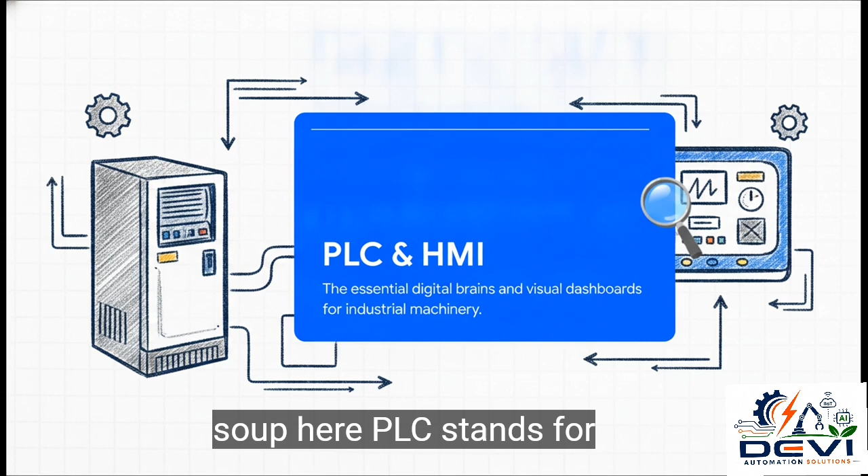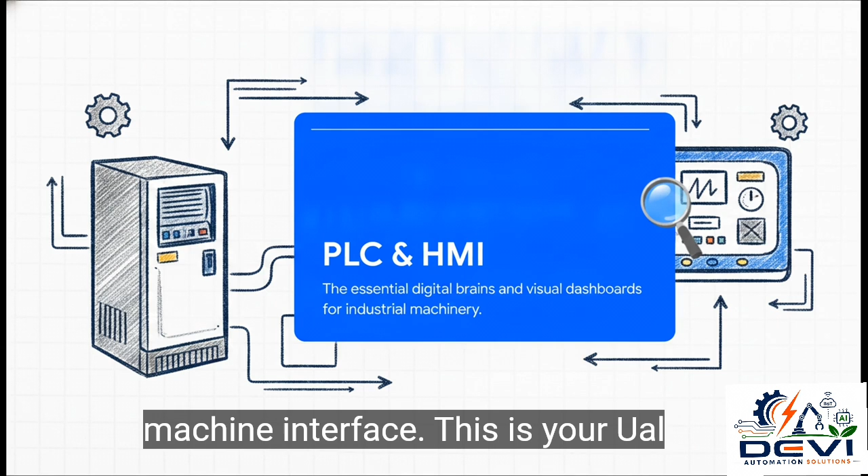So let's unpack the alphabet soup here. PLC stands for Programmable Logic Controller. It's essentially a ruggedized, super heavy-duty industrial computer making all the actual logic decisions on the floor. HMI stands for Human-Machine Interface. This is your digital dashboard, the physical screen, the buttons, the graphics, that allows an operator to monitor the system and jump in if needed. The crucial takeaway: one calculates the complex behind-the-scenes logic, and the other translates all that data into a visual, touchable interface.

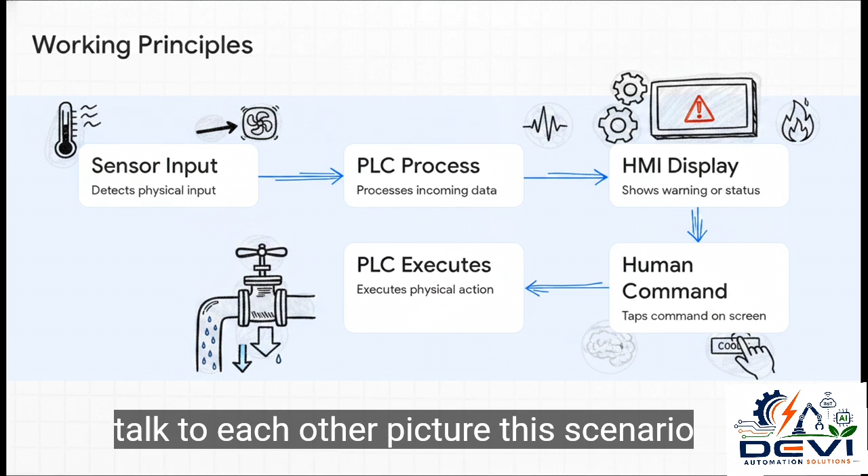Moving to Section 2, Components and Working Principles, basically how these two systems actually talk to each other. Picture this scenario: a machine on the floor is starting to overheat. Step 1, a physical sensor detects that temperature spike. Step 2, the PLC brain instantly processes that incoming heat data.

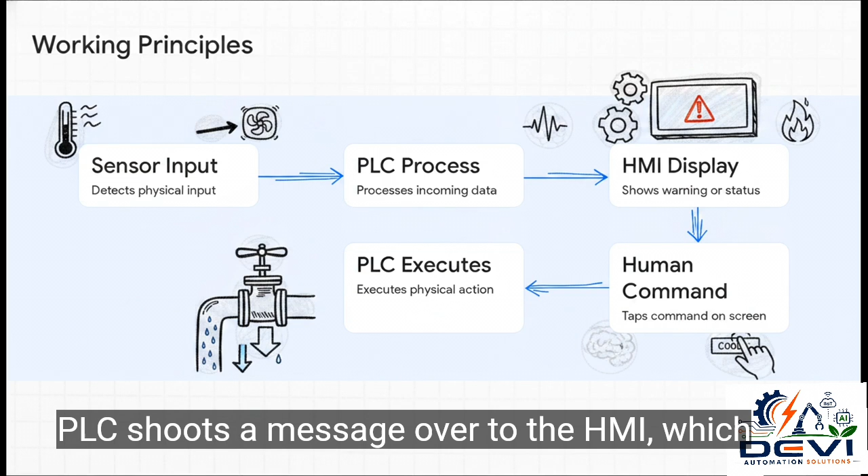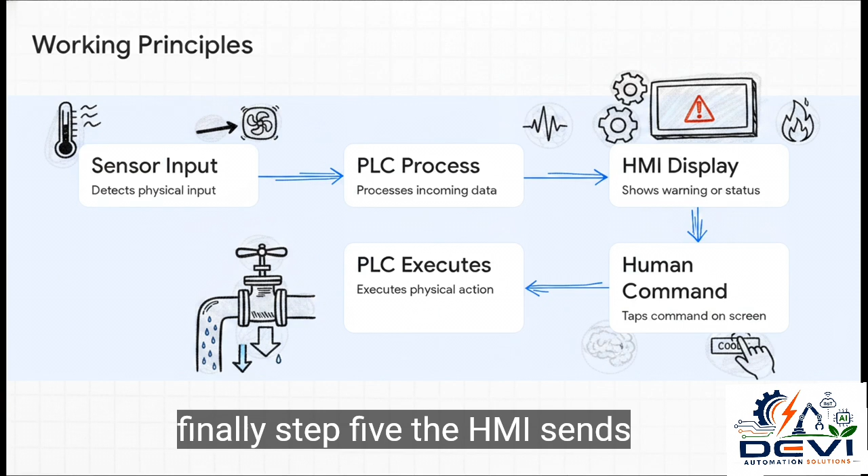Step 3, the PLC shoots a message over to the HMI, which immediately flashes a bright red warning on the operator's screen. Step 4, the human operator sees that visual cue and taps a cooldown command right there on the HMI. Finally, Step 5, the HMI sends that instruction back to the PLC, which instantly opens a cooling valve. It's a flawless split-second conversation happening in the blink of an eye.

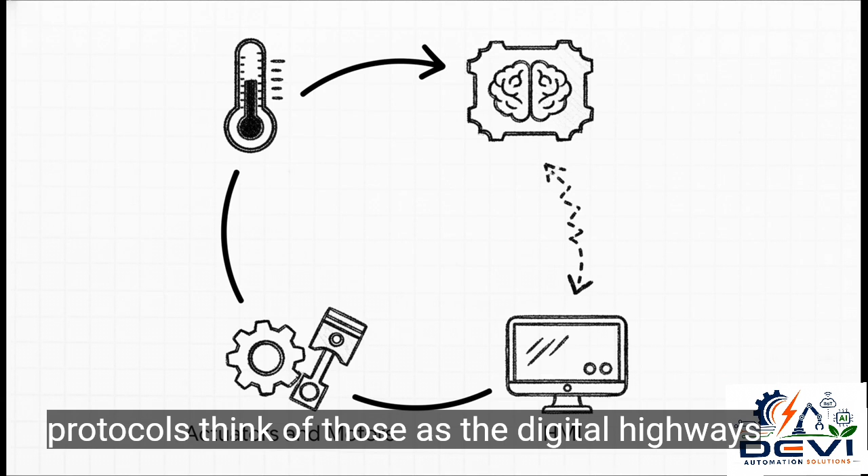Now, to pull off that flawless loop, you need a highly synchronized network of specific parts. You need sensors to gather the raw data from the real world. You need PLC processors to crunch all those numbers. You rely on communication protocols, think of those as the digital highways carrying messages back and forth. You need interactive HMI screens for the human to look at, and finally the actuators and motors to carry out the physical actions. Every single piece is absolutely essential to the puzzle.

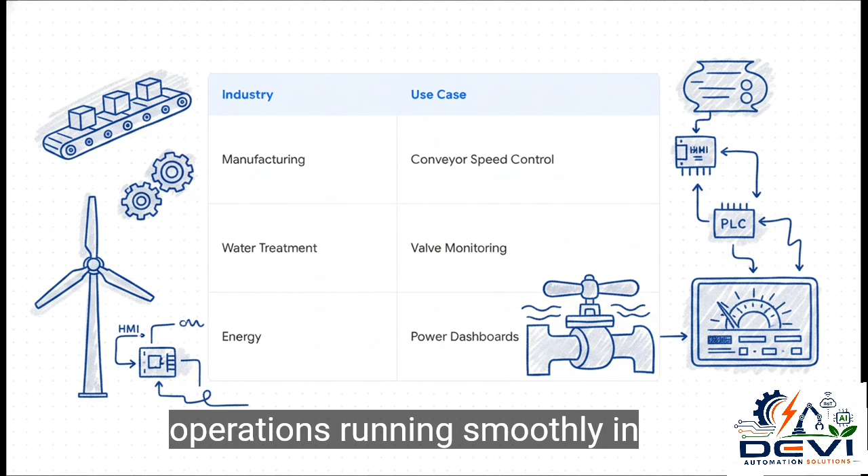Okay, Section 3, Real-World Applications. Let's ground this theory and see it in action. You literally see this dynamic duo everywhere, keeping incredibly complex operations running smoothly. In manufacturing, operators use HMIs to fine-tune conveyor speeds through the PLC, making sure products don't pile up and cause a jam. In water treatment facilities, a single operator can monitor massive flow rates and open or close giant valves without ever leaving the control room.

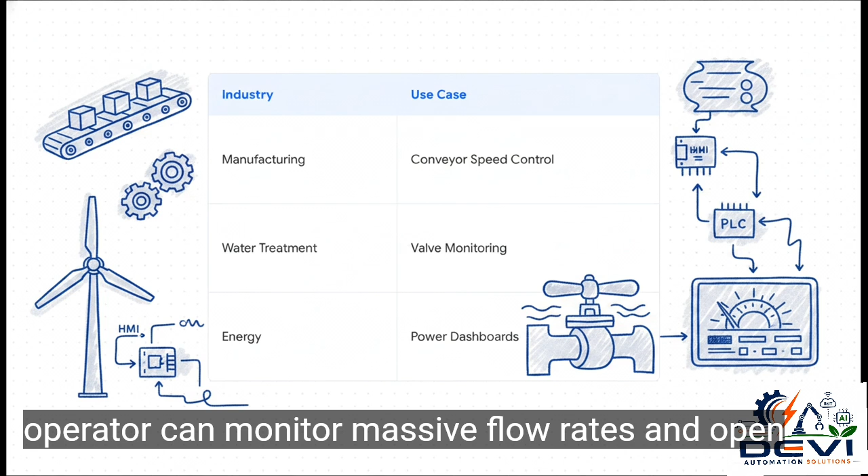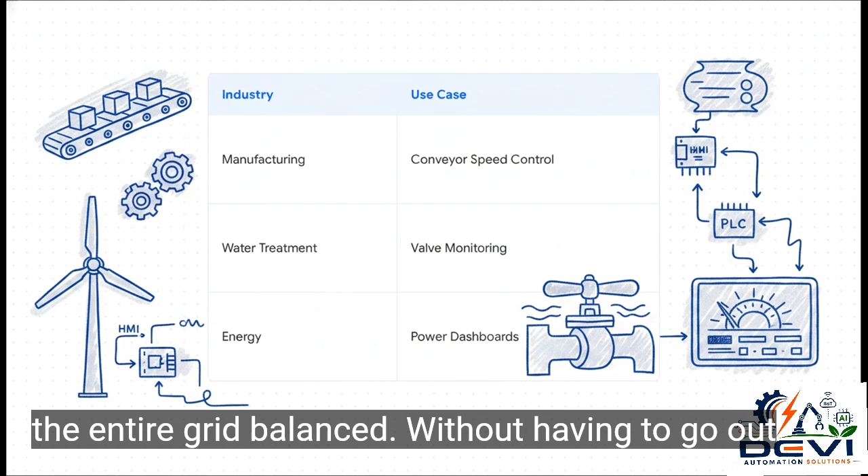And in the energy sector, engineers rely on these exact systems to monitor real-time power output dashboards, keeping the entire grid balanced, without having to go out and manually inspect the turbines. It is seriously powerful stuff.

Which brings us to Section 4, Benefits of Integration. Why does perfectly linking these systems actually matter? Honestly, the benefits are massive for the bottom line. First off, real-time monitoring, you know exactly what is happening the very second it happens. Secondly, it significantly reduces downtime because problems are caught early, way before they trigger a full shutdown. You also get centralized system control, meaning one single operator can run an entire factory wing from one chair.

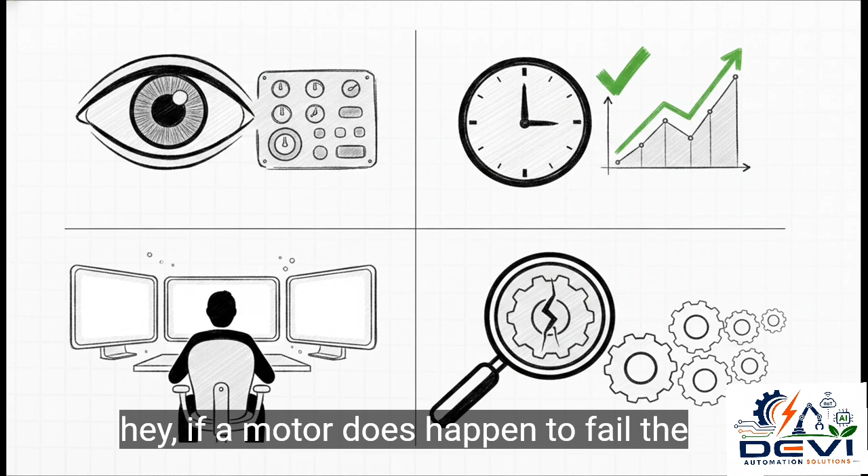Plus, it takes overwhelmingly complex machine data and turns it into simple, digestible visuals. And if a motor does happen to fail, the HMI tells you exactly which motor failed. Troubleshooting has literally never been easier.

And that leads us to Section 5, Devi Automation Solutions, the master builders behind these integrated systems. Devi Automation Solutions lives by a pretty awesome, simple motto: Smart technology, powerful solutions, better tomorrow. They aren't just specializing in one narrow field, they're out there integrating this complex automation technology across heavy industry, cutting-edge data networks, agriculture, and renewable energy. They're taking the core PLC and HMI concepts we just talked about and scaling them up to build the infrastructure of the future.

Just look at the sheer breadth of their core services. We're talking the factory floor with advanced PLCs, HMI, SCADA networks, and VFDs. But they also dive deep into next-generation AI and industrial Internet of Things solutions. And they don't stop at the factory door either. They apply this exact same automation logic to smart agriculture to optimize crop yields, to solar energy solutions for sustainable power, and even down to home automation and robust panel solutions. It is a fully integrated suite designed to bring intelligent control to literally any environment.